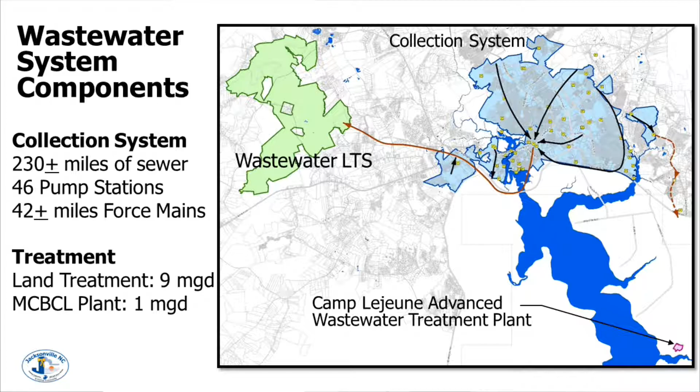All right, so let's talk about some impact to the utility projects. One thing I think it's important to note is the projects we're going to talk about are based off of the needs that DOT and our MPO, our Metropolitan Planning Organization, have identified as needs for the city.

And that's not just the city, but the county as well. It's how do we get our citizens throughout the city more effectively. The projects we're going to talk about are fully funded with DOT, and they're all at various stages. The estimates we have are based off of about 25% design, so we have an idea of where they're going, but we don't really know the true financial impact on the city.

So the estimates are just that, they're estimates. As we refine the projects, we'll actually take it back before council with a refined cost, usually with a utility agreement. The utility agreement is based on the result of the bid cost, so that way we'll have a much better idea of what the true impact is.

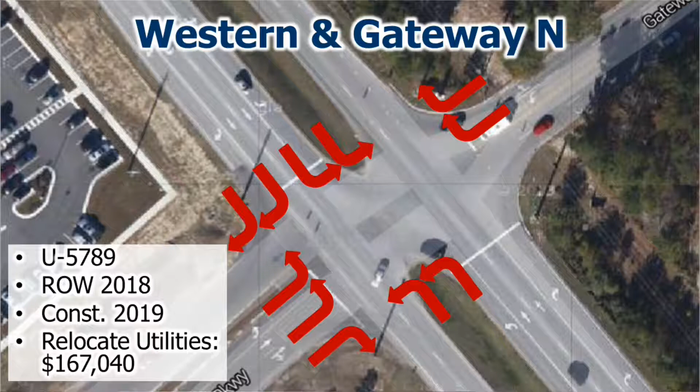As we move through the DOT impact on our utilities, it's important to note that in many cases we're having to adjust, not replace, but adjust utilities that we would not touch otherwise. This is in addition to any projects we may need to do for our ongoing programs or maintenance. Unfortunately, this is an outside pressure we will have to deal with, and it could cause future impact on those projects.

What we try to do is, it's easy for us if we can install our utilities within the existing DOT right-of-way, which helps because we don't have to go out and secure an easement. Unfortunately, sometimes we are within their right-of-way. However, if we find that we installed infrastructure within an easement, or one where there's prior rights where we were there before DOT accepted the road, then it's a cost we would not have to incur. So it's additional staff time reviewing plans and doing deed research to find that, so we can minimize the impact on the city.

Another project is the Gum Branch widening, and they're proposing to expand Gum Branch, I think from 2 lanes to 3 lanes, perhaps, from Summersill all the way out to just outside the limits of Richlands. Again, right-of-way started in '17, construction in '19, and right now we're estimating about $108,000.

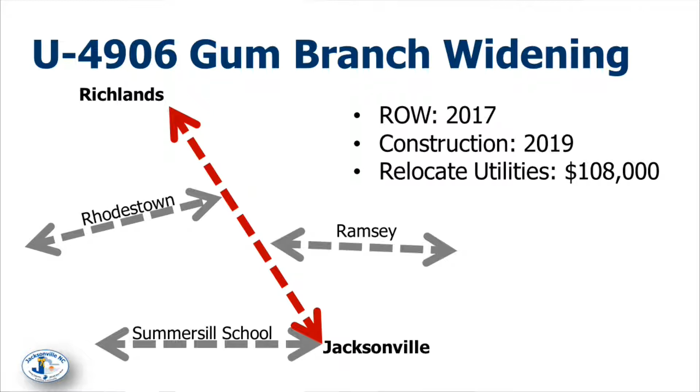These are just rough estimates at this point for this construction. DOT's schedule for right-of-way acquisition and construction is ever-changing, so some projects are being accelerated while others are being pushed out a little bit. Oh, so this one is 4 lanes, it'll be 4 lanes, from 2 to 4 lanes. So it's 4-lane, not 3-lane? Yeah.

If anyone has additional questions, comments, or concerns about any of these DOT projects, I believe our MPO has this information on the city's webpage, or you can go to DOT's website and get more information on each of the specific projects.

The next project is Western and Gum Branch. Again, their focus is mainly on Western Boulevard right now, and you can see how we're substantially changing the configuration at this intersection. I believe they're also extending the turn lane as seen in yellow. They're looking at potential construction this year, with roughly an impact of about $162,000.

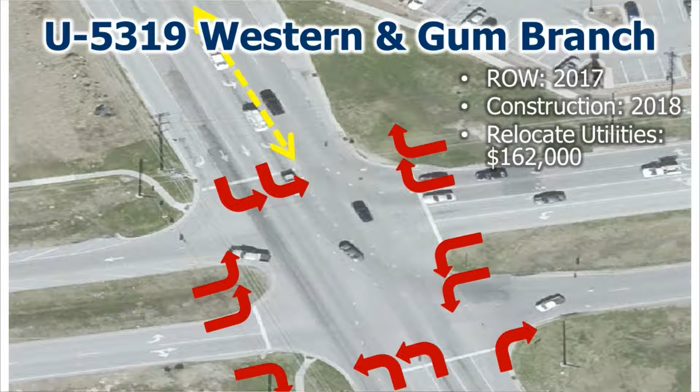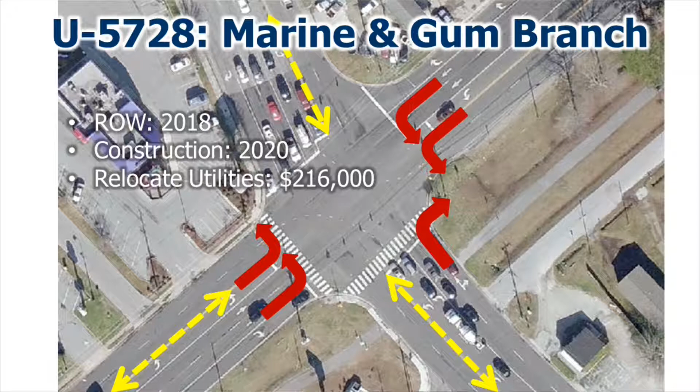Marine and Gum Branch, this is going to be great because it's adding double turn lanes on Marine Boulevard. We do have some infrastructure that will be impacted. We're looking at construction in 2020, with a potential impact of about $216,000.

So again, we go through all of the deed research. We are working with DOT to help minimize some of these conflicts. So all of this is just a work in progress as we go forward through the entire design process.

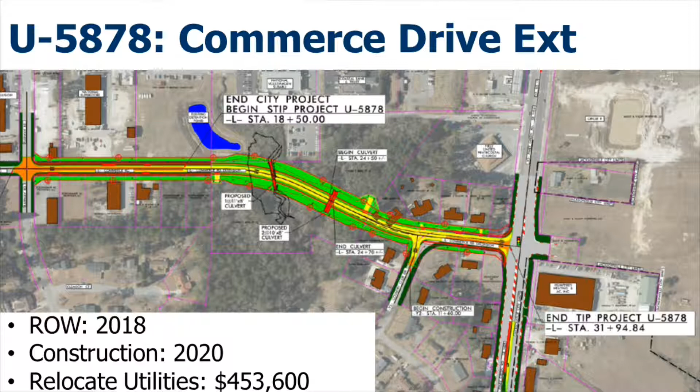We're looking at the potential impact for relocating utilities at $453,000. But again, this is still rough concept. I know staff has looked at it, but I'm not quite sure how valid these numbers are. This was, again, looking at potential impact, looking at DOT's estimator for a particular line size and linear foot, and just plugging in a number. So as we go through this, it'll be refined.

Again, the whole point of the CIP is to have a planning document to show the potential impact that some of these projects will have. And this is just the start. These were only 5 or 6 of the most pressing DOT projects. There's another, I think, 8 projects that we haven't even estimated yet because they're a little farther out.

That'll be no more. That'll be a median, where they'll have bulb outs for you to do the U-turn. Just like you have on the Jacksonville bypass, that's what a super street is. So because there's so many accidents occurring, that's why they're putting in the super street.

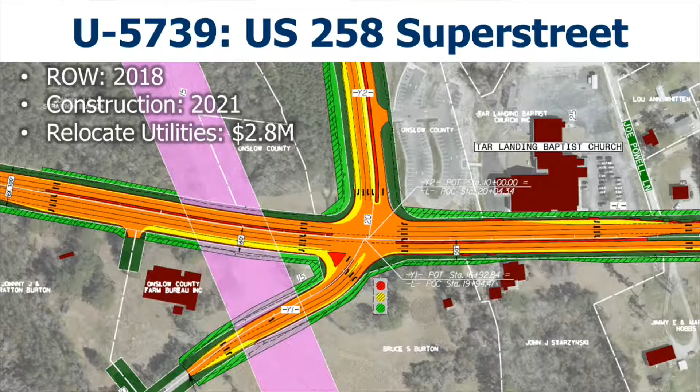Okay, so yeah, this is only highlighting right at this intersection at Pony Farm, but yes, you are correct, it goes all the way. The real big impact, if you haven't seen that project, you need to look at that project. It shows the proposed locations of those turns and bump outs. And we can get those plans.

I think did we just get those? I think we just got 25% plans. They're, again, rough concepts. Okay, thank you.

Moving on, let's talk about some ongoing projects, some of which you've seen - the well rehabilitation projects. Last CIP, we identified an ongoing, recurring project to address our well sites, and set the budget so it would be every other year. This is just an expansion taking it out to the end of this CIP process. Each of these projects we've estimated at about $250,000, and Joe has identified the need - if the need changes, we can just switch out whatever well we're working on.

So again, this is just one of our ongoing projects. Before we leave that one - these are rehabbing wells, some built in the 60s, many in the 70s. This won't be a continuing project forever, it'll be until we rehab those older sites. Most of our Castle Hayne wells were built in the early to mid 2000s, so at some point we'll have to face a similar program for those, but that's in the future. When you rehab one of those wells, what do you expect its life to be after the rehab in years? Well, we got 40 and 50-year-old ones now.

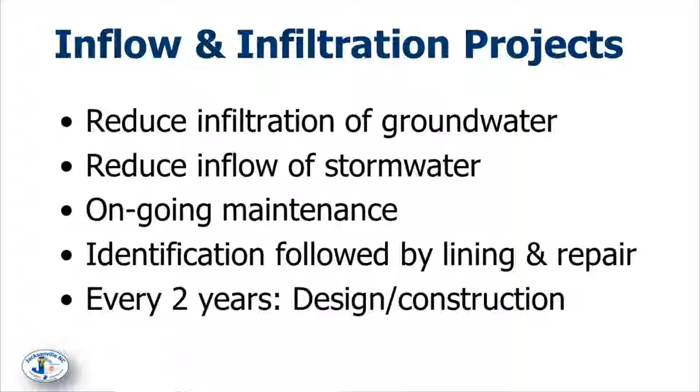Have you had any issues with that since you've been doing the lining system? The only issue that may occur is if they forget to cut somebody's service connection out, but we know that pretty fast. We have had one or two that have flattened out that they've had to go in and cut out and redo that section, but that's infrequent.

About how much distance-wise - miles of pipe, feet of pipe, whatever - have you covered over the last couple of years, since I know you keep reporting on doing these I&I projects? How much liner have you bought? We've been doing these projects since 2007, and we've done 4 major projects, with one of those having three sub-projects. So we've put out a lot, I just don't know what the number is. We can certainly figure it out and report back.

Are these usually in areas that you've already smoke tested or not? We've typically looked at them through television examination. We'd like to have had some flow monitoring done so it gives us an idea where to go, looking for the worst places, and then start televisioning that area, looking for where the problems exist.

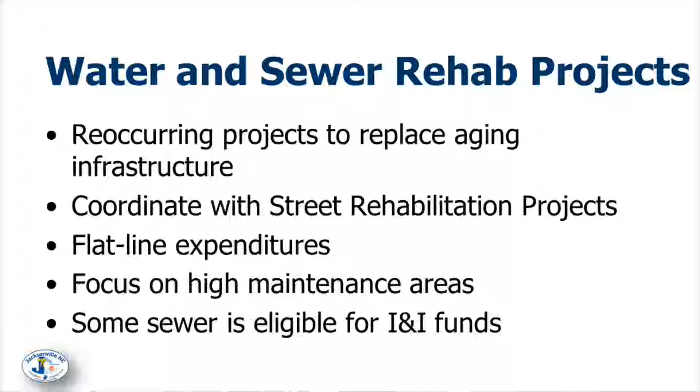Another ongoing project is our continuation of the water sewer rehab projects. This is an ongoing process to replace aging infrastructure, and we coordinate this a lot with our street rehabilitation projects. So as a street is identified for resurfacing, we also go in and evaluate the infrastructure, and try to identify if there's a sewer line that needs to be rehabbed. There's a possibility we can use I&I funds for that rather than our sewer fund - they're two different funding sources.

The purpose of these rehab projects is to flatline our expenditures. Similar to the well rehab project, we identify a certain cost per year, and as streets or projects are identified for aging infrastructure, we already have a budget to make those repairs happen. We try to focus on areas that might have a high demand for service calls, like point repairs, and we can normally tell by our work order tickets. That's the areas we focus on as well.

Moving on to the projects identified for this funding year. One project we're looking at is the Brynn Marr force main relocation. We hope you had the opportunity to view Greg Mashaw's presentation this past Tuesday, where he briefed council on some of the challenges and opportunities ahead as the city continues to grow. Part of that was the challenges with storage capacity at the land treatment site, as well as capacity within our collection system. As a result, one project staff identified was the relocation of the Brynn Marr force main.

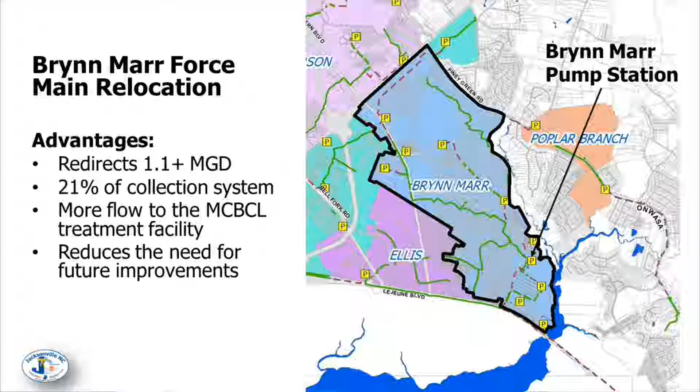So what is the Brynn Marr force main relocation? Right now, the advantages we see with this potential project is the ability to redirect a little over 1 million gallons of discharge, representing about 21% of our collection system. The advantage is we can move this flow to the Marine Corps Base treatment facility. Their treatment facility is mainly industrial, and they need more residential discharge to help all the chemicals work well on the treatment side. They seem open to taking additional capacity, which also helps us reduce the immediate need for some of our future improvements.

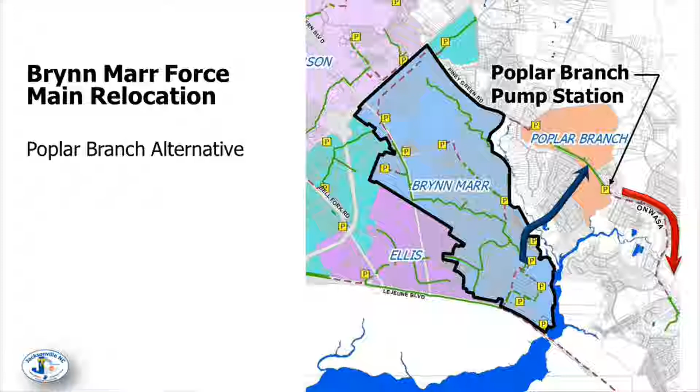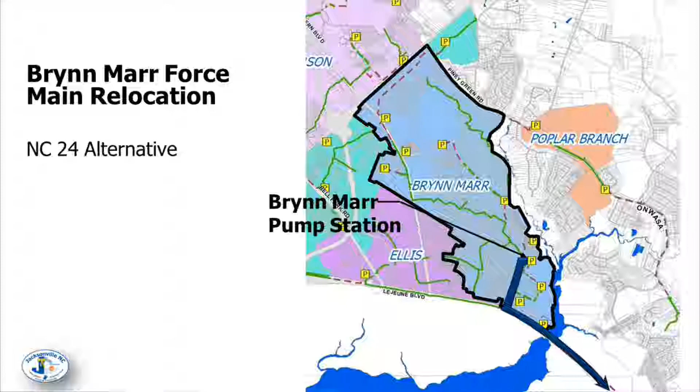So what does it look like? One option is what we're calling the Poplar Branch alternative - taking the Brynn Marr force main and rerouting it to Poplar Branch, where we have an existing sewer line. When we constructed Piney Green, we put in the sewer line which already discharges to the base, so that's one option. The second option is that we redirect Brynn Marr down towards NC 24 and then to the Marine Corps Base. Both of these options are still conceptual - there's a lot of work that needs to happen to even evaluate them. Our goal is that in the beginning of next fiscal year, we can start looking at this alternative, which will help us address the challenges and opportunities with storage capacity at the land treatment site, as well as capacity within our collection system.

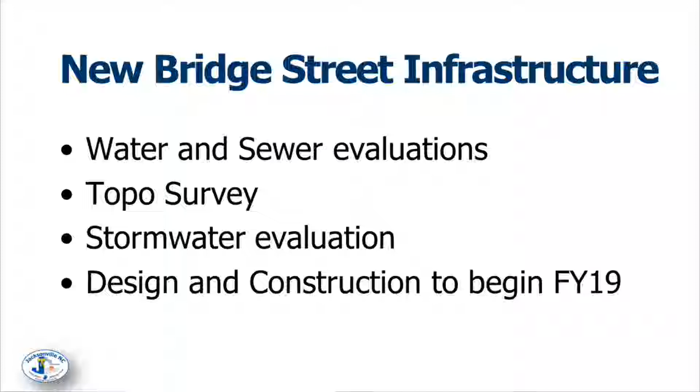Now we're moving to New Bridge Street infrastructure, found on page 12. One project we've been working on is the New Bridge Street infrastructure and Streetscape project, looking at rehabbing 4 blocks on New Bridge Street from Warlick down to the Freedom Fountain. We've had to do a lot of work up to this point - so far we've conducted water and sewer evaluations, done a topographic survey, and done a stormwater evaluation. Right now we're hoping to start design and construction in FY19.

So what did we find on the sewer system? After we cameraed the lines, we found they were structurally sound, but we did have some leaking joints. There was one single point repair, meaning we couldn't line this one area because the line had collapsed, so we're actually going to do that point repair now. That'll be going out for advertisement in the next couple of months.

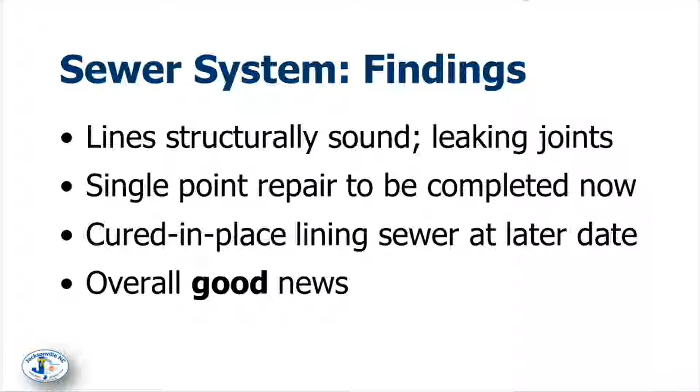But we can line the rest of the sewer, which means we don't have to do it right now. We can wait to do this. Overall, this is great news, because that means we don't have to do anything with the sewer side.

On the water side, we found that the existing lines are old. We do have a history of maintenance. We've got leaking valves, and the water lines are located within the travel lanes. As a result, we've determined that all the lines need to be replaced. We also want to either move or add hydrants into the bulb-out area with the new streetscape concept. So overall, bad news, because we're going to have to replace all the water lines.

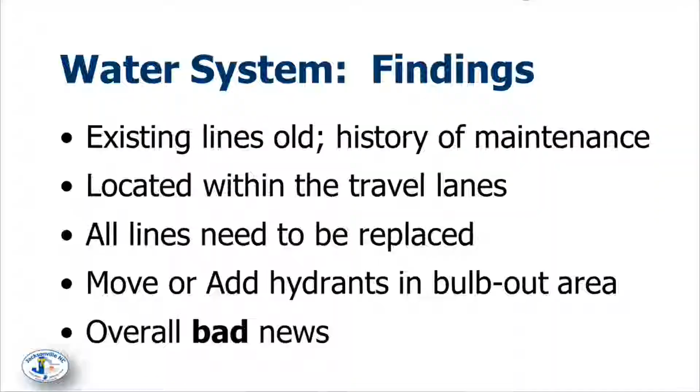We've made up for the difference in elevation between the existing sidewalk and the back of curb with our brick utility strip. So the concept is that as we add the street lighting, etc., everything would be done within that utility strip.

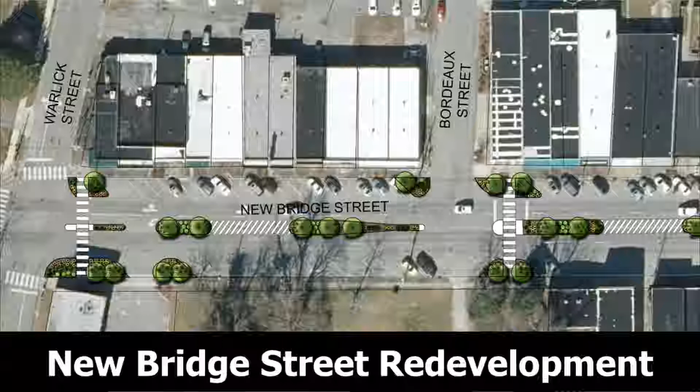So here is the concept of the streetscape. As you can see, we're adding crosswalks and bulb-outs. We've had a center turn lane that's divided, so it's got some landscaping and some where it's just hatched mark. That hatched mark will allow for temporary deliveries or UPS, etc. We are going from a 4-lane to a 2-lane. The angled parking still stays.

And again, this is conceptual. This was just kind of a rendering of what we're hoping that it will look like.

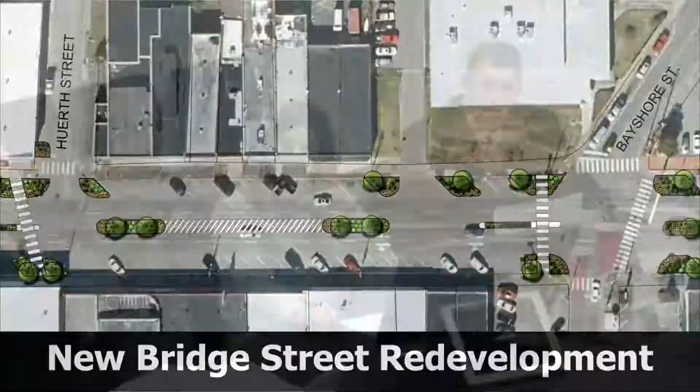There was some talk about them burying the utilities there too. We are in the process of undergrounding all the utilities, getting rid of the poles, and we're looking at putting up some street lighting as well, maybe mimicking what we have currently in front of City Hall.

So it's a very big project. It's more than just the infrastructure. But when we started looking at this project several years ago, we felt the need that you can't just do the streetscape portion. You've got to look at it as a holistic project, because we knew the infrastructure needed to be identified. That's kind of where we're starting.

And before we leave that— Mr. Nichols isn't here, so I'll go ahead and answer his question that I did anticipate. The water and sewer fund would be responsible for paying for water and sewer improvements, not sidewalk improvements or street paving, or street lights, or undergrounding power lines or anything like that. So I want to make sure that we've answered Mr. Nichols' comment, even though he wasn't able to attend tonight.

So if you look at the project itself, to Wally's point, I believe there's like 4 or 5 different funding sources. As we present this CIP to council, that'll be one additional thing we'll be looking at: what is the potential impact to all of the different funding sources, and do we need to make any additional changes? So that'll be something for further discussion.

Could you mention what the Powell Bill is? So Powell Bill funding is funding that we get from the state through the gas tax that pays for any improvements to the street itself—street paving, sidewalks, trails, anything that's within the right-of-way. There's very specific projects that we can use Powell Bill funding for. You'll see that there's a pretty high cost associated with this particular project, and that's a result of all of the sidewalk. The sidewalk cost that we got for the small portion of the project was very high. We're hoping that as a larger project, that price will come down substantially and that cost won't be as high.

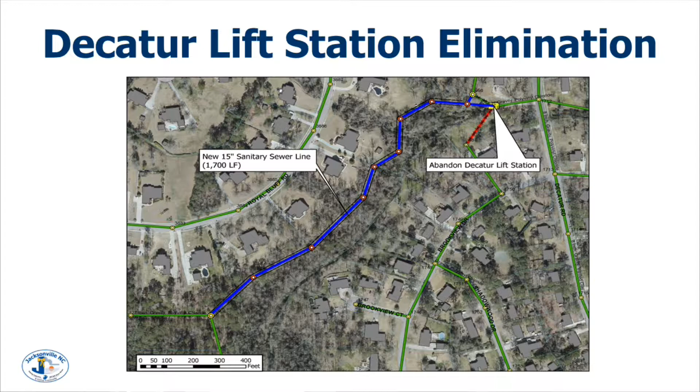The next project is Decatur Lift Station, found on page 18. The goal of this project is the hope and desire to abandon Decatur Lift Station, which is off Decatur Road, in the back of Brookview Drive. If we can eliminate it, it saves us costs in the long run with operation and maintenance. If able to abandon it, we'd install a new 15-inch sanitary sewer, about 1,700 linear feet, in the back of the Royal Bluff subdivision, connecting to the existing Brookview outfall.

If, through analysis, we determine we can't abandon Decatur, we'll create a larger wet well for additional holding capacity, and we'll evaluate the station itself to see if the pumps need replacing, new electrical, et cetera. This year we'll be looking at those options and doing a cost-benefit analysis to see which is most advantageous for us. It's the one that floods.

This is the one that's right near a stream, and response time is very little, so if it goes high we have to respond very quickly. The wet well is small. Is that also in the area where the lines are really flat, causing issues before, with 12s and 8s mixed in and very horizontal runs? Is this the one where you put all those joints on to hold the lines? No, that was Brookview. Decatur feeds to Brookview. Right, you can tell we pay attention. There's a lot going on in that area.

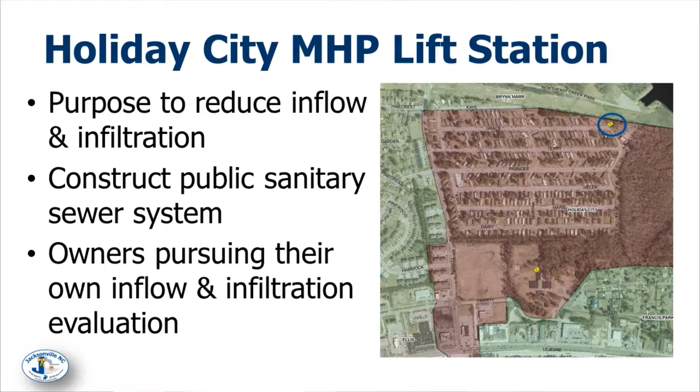Moving along to Holiday City Mobile Home Lift Station, on page 20. The goal of this project initially started with wanting to increase the size of the wet well, and while we were there, we needed to identify a resolution to reduce inflow and infiltration in the area. The Holiday City Mobile Home Park system, everything shaded, is actually a private system that drains into our pump station. They have high I&I, so we conducted a preliminary engineering report. The city hired an engineer, and we looked into abandoning their private system and installing a new public system, where the Holiday City owners would reimburse the city. That report came in with an estimated project cost of $6.5 million. The owners decided they would pursue their own inflow and infiltration program instead.

So as a result, the city is back to the original concept where we're going to increase the size of the wet well and move forward with that project. The city manager and the owners of Holiday City Mobile Home Park are continuing conversations on how to recapture some of that cost as a result of the I&I.

Does that lift station feed the Brynn Marr lift station? It does, which would then be going to the Marine Corps base. Does this lift station service anything other than Holiday City? A small area, it does. And how many units are at Holiday City?

They have an agreement, and I don't remember the exact number, but they have an agreement as part of their planned development that they can go up to a certain number. Do you remember? It's 170.

So you're looking at 6.5 million for 170 units? It's more than that. We'll get you the number. We'll follow back up with the number of units that they can have per their agreement.

That's still a lot at $6.5 million, isn't it? It is. Well, that's why per unit the cost was not feasible, just to go in and replace the entire system.

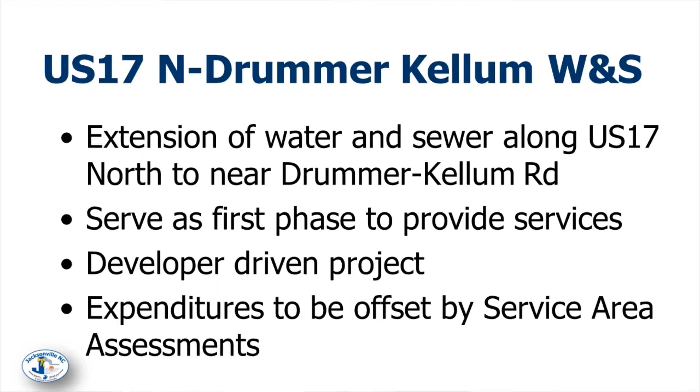Right, the next project is US 17 North Drummer Kellum Water and Sewer Project, on page 34. This is actually a carryover from last fiscal year. It's an extension of water and sewer along US 17 North to near Drummer Kellum Road, to serve a planned commercial subdivision. But it's developer driven, so we're waiting for the developer to say he's ready, and when he's ready, we're ready to provide some services.

What we've done is the expenditures are to be offset by a service area assessment. We've already identified this area, so we'll recoup the cost. The city will front load the cost, and as development comes in, they pay a service area assessment fee for that area in addition to the system development fees.

This area is currently outside the city of Jacksonville, so is it going to be annexed in? Yeah, they would have to annex. It's actually right across from North Marine Town Center, where there's a new gas station, at the corner near Stevenson Toyota, closer to the Toyota dealership, across 17.

This wouldn't be a spot annexation, it would be an adjoining one? The road right-of-way would count, and it is across from North Marine Town Center. But would it be off all by itself from everything else on its side of the road? Yes, that would be the only area, and it would be a commercial development.

Would it actually annex everything from where you go into the north side to Drummer Kellum Road? No, it would just be the parcels involved in the development. We cannot go out and force annexation anymore, so it's not that we would be going into that area and taking over existing development. It would be owner-requested annexation.

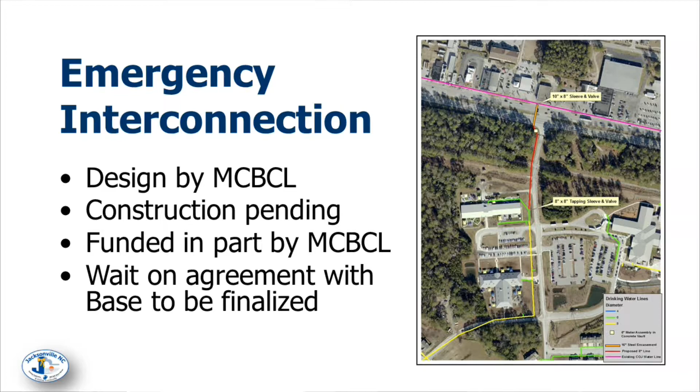Which road is that right there? Is that TT? Iwo Jima, Iwo Jima. It's TT, yeah, let's do that, yeah.

And then the Black Creek raw water wells, that's on page 39. This is a carryover from last year for some planning. We didn't have to do anything last year, so we just pushed it ahead another year.

This is what Wally was mentioning earlier, that this project is a result of the Onslow Water Resources Group, where we are trying to identify 3 locations for new water wells, and then the transmission mains for their conveyance. But this is really dependent on the results of the state's desire for our potential withdrawal or not withdrawal from the Black Creek aquifer.

So the project's kind of on hold as we're waiting to see what the state's determination is, and it's also in conjunction with the work that we did over at Burton Park with that monitoring well. So everything's kind of in limbo.

But again, going back to what the CIP stands for, this is our planning document, so we wanted to make mindful that we do need to identify potentially 3 new sources of wells. What has changed in the project is that we split it - this was one massive project, and we split it into 2 phases. That's different from last year's CIP. Cost is the same, we just split it into 2 phases.

And if you'll remember from Dr. Sproul's presentation last month, he has the report prepared from our monitoring wells, and I'm expecting a draft at any time. He's planning to submit that to the state middle of this month. The next phase of reduction that we would have to face is August of 2018, this year. So we are getting that to the state with plenty of time for them to review.

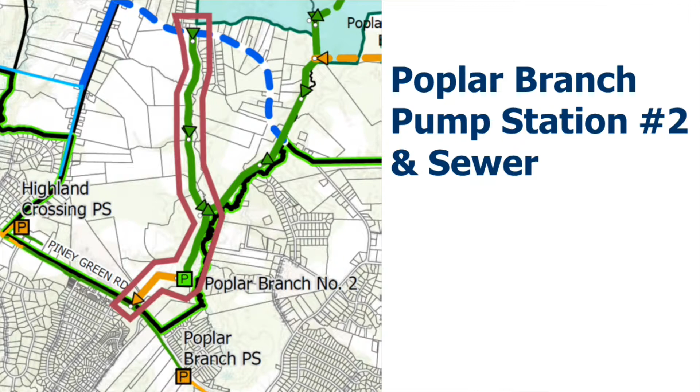So this is, again, a project that we have identified that's needed for potential growth. As growth may or may not happen, we'll make changes accordingly for this project in either moving it up or pushing it out. We have identified a much larger plan, so as this project takes on, you'll see in outlying years and future CIPs additional projects in this area.

And before you leave that, one of the things I'd like to point out - I know that 2026 is a long ways out there, and I think the importance here is that we're master planning that area, because where that pump station is situated is part of the Patriot Park subdivision that was proposed at one time.

And while that hasn't developed out yet, when it does, we want to be able to go ahead and identify where we need future facilities if we're going to continue to grow in that area. So that's part of the importance of looking at that now.

So where do we go from here? As of now, staff is looking at presenting the CIP, very similar to what we've done tonight, throughout the entire CIP on April the 3rd. Then we'll be making adjustments to schedules as needed with regard to funding, and our plan is to come back to the Water and Sewer Advisory Committee and seek recommendation on any changes discussed. As always, the CIP is adopted with the budget by June 30th of every year.